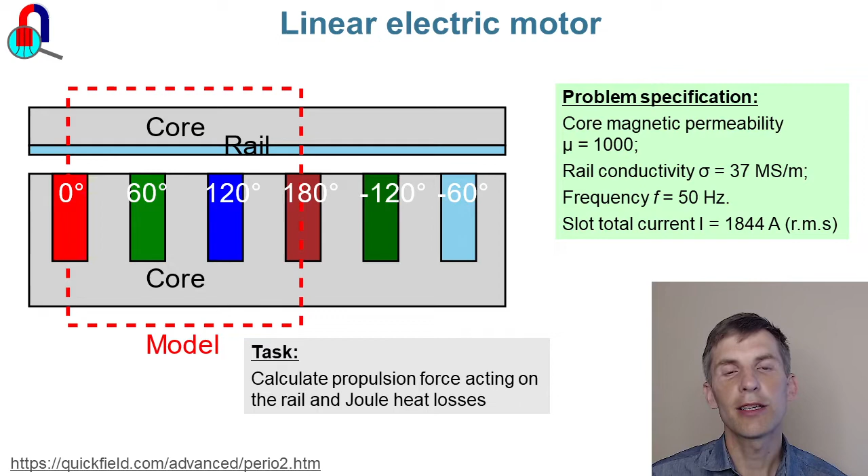Okay, let's start QuickField now. In QuickField, I create a new problem. Motor. Next. Problem type is AC magnetics. Frequency is 50 Hz. Every simulated device is a three-dimensional object. I'm going to simulate only a single cross-section, so the model class is two-dimensional plane parallel. Length units are millimeters. Finish.

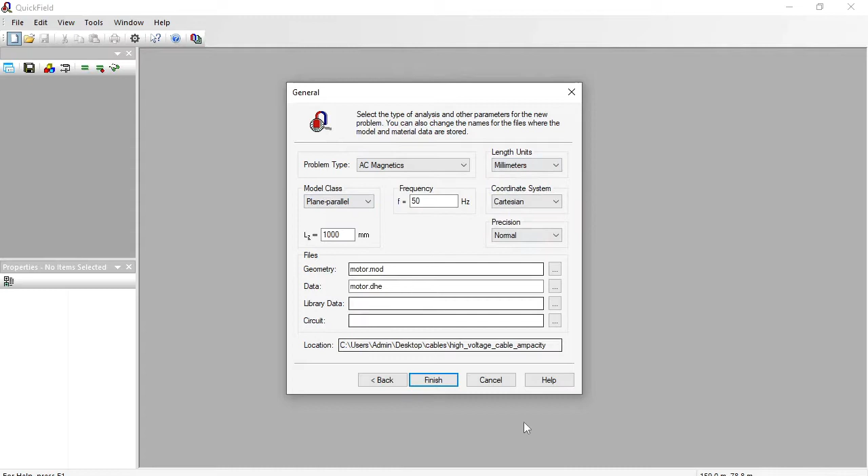On the left you can see the problem pane, and on the right is the geometry model editor window. You can draw the geometry model here, or you can import the model from the AutoCAD DXF file. Here is the file, and I will import it. This is the geometry model. You can simulate it as is, but I'm going to demonstrate how to utilize the symmetry of the geometry model. So I'm going to reduce the simulation domain.

Next, we have plus 120, and next we have minus 60. Again, they are opposite. That is called odd periodicity. Okay, switch back to QuickField.

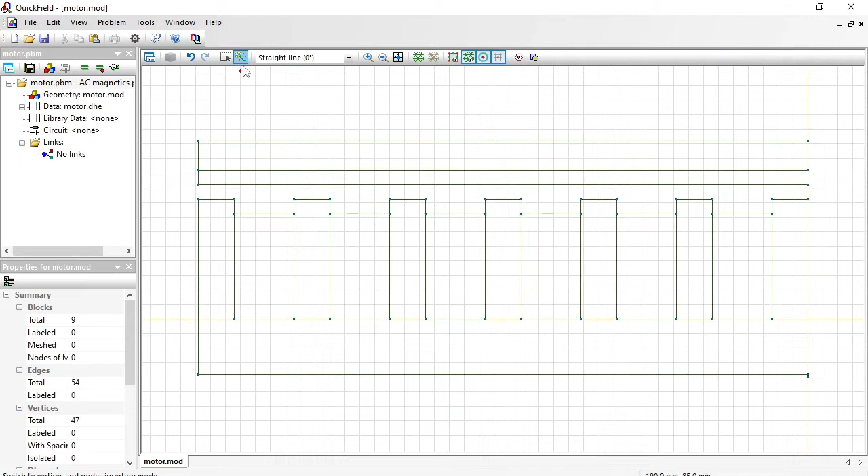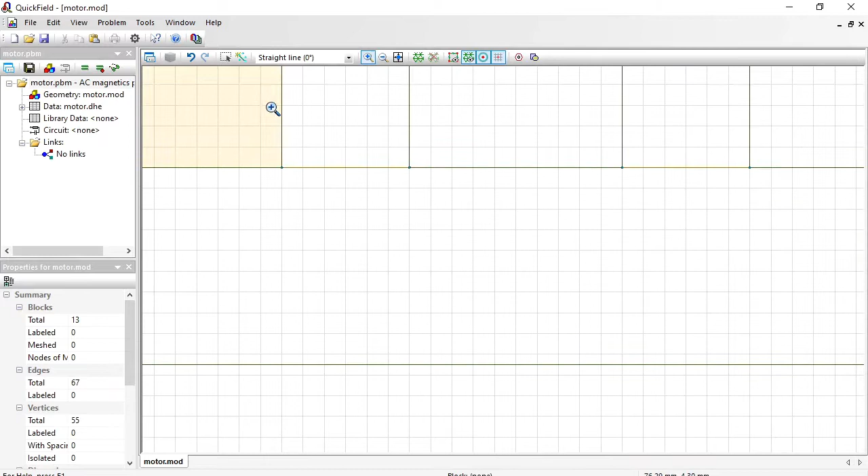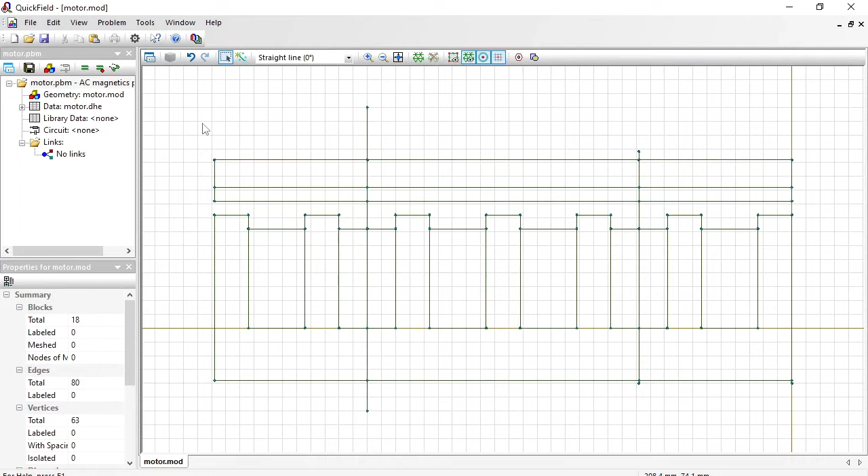Here I will switch to insert mode and draw the vertical lines here. And here, let's zoom in and zoom in again. Here. Okay, zoom to fit, switch to select objects mode, and remove the unnecessary parts. This one and these small edges.

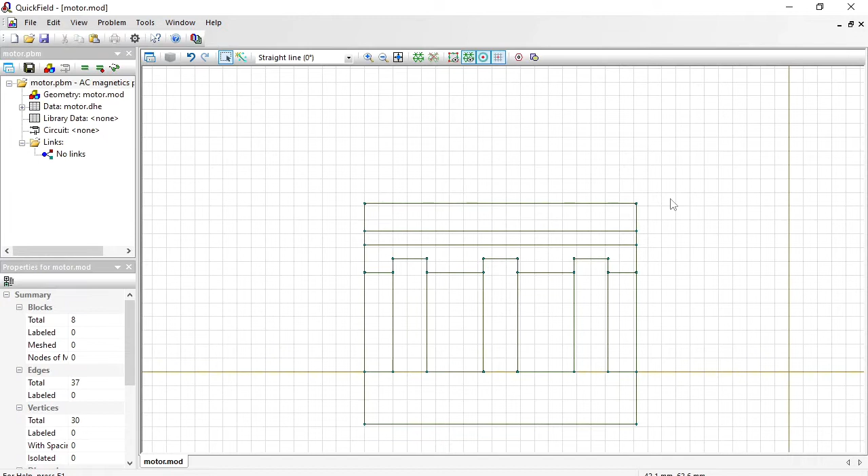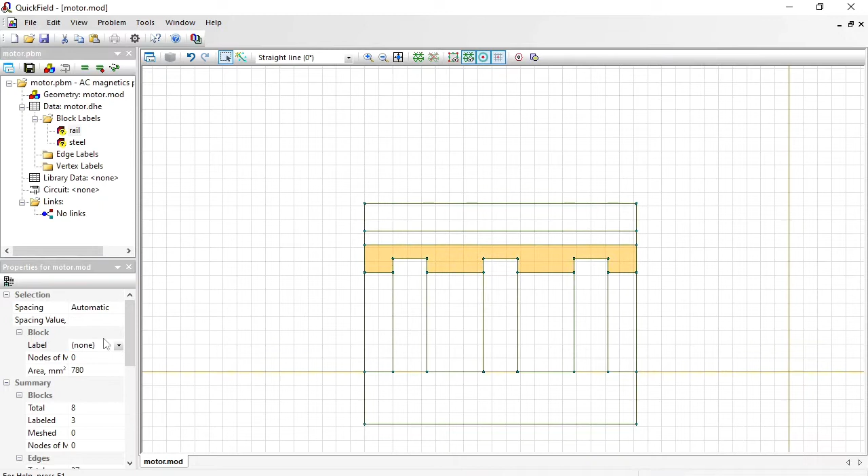Now let's assign labels. With labels, we will explain the geometric objects' meaning. This one and this one are steel parts. Steel. This is the conducting rail. This is the air. This is slot 0, slot 60, this is slot 120, and this is slot 180.

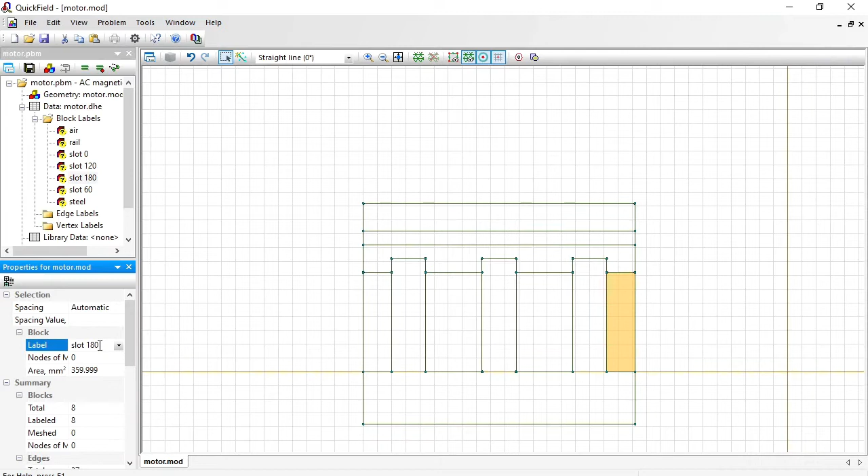Okay, and I should assign labels to the boundaries. Left and right boundaries make up an odd boundary condition pair. So I will select left and right. Hold the Ctrl button pressed to select multiple objects at the same time. Odd. And this is bottom. And this is top. So far, these are just text labels.

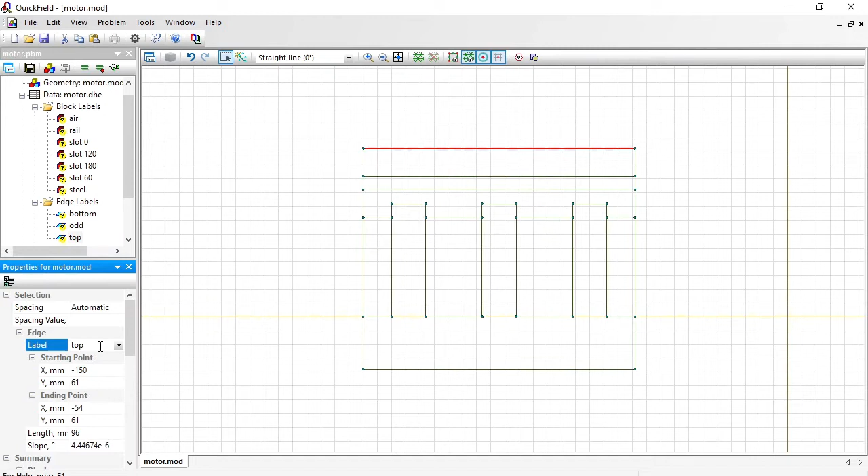Now let's provide physical properties for these labels. Double-click the label name in the tree. The relative magnetic permeability of the air is 1. Okay. Relative magnetic permeability of steel is 1000. Steel is laminated, so I do not specify electrical conductivity here, and I do not specify any current density here. Okay.

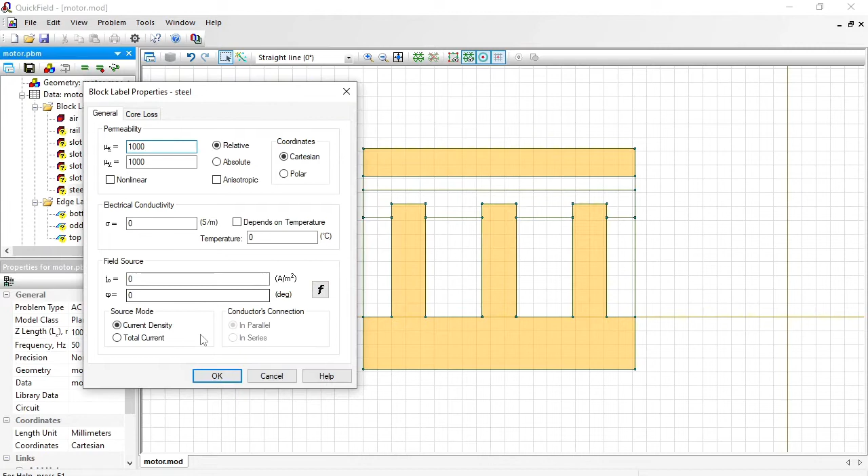A rail is made of aluminum. Permeability is 1. Electrical conductivity is 37 megasiemens per meter. Rail is not connected to any sources, so the total current in the rail is 0. Well, of course, there will be eddy currents, but the total remains 0. Okay.

There is a multi-turn winding in the slots, and each small conductor of the winding carries the same current. So the current density distribution across the slot is uniform. We can model this by specifying the current density value, which is current divided by the conductor cross section.

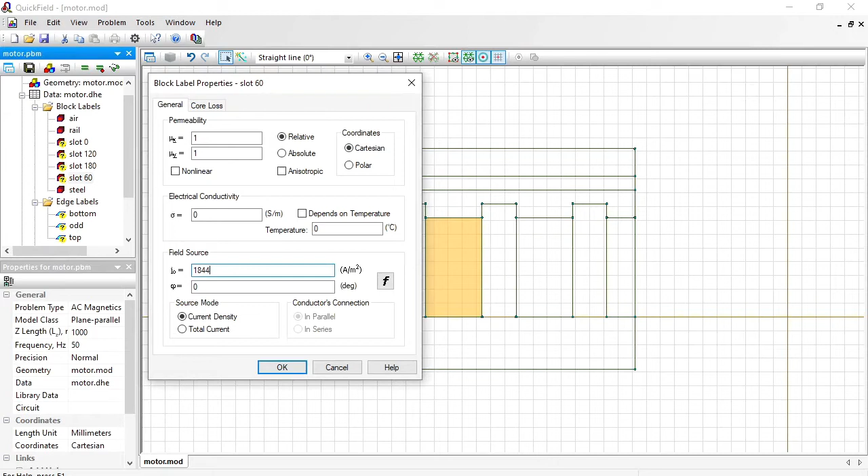The current is 1844 amperes, and the conductor cross section is, now let me see, I'll click here again. Here it is.

(720 millimeters squared), and here I should convert to meters squared, so times 10 to the power of -6. This is the root mean square of the sinusoidal wave. But in QuickField you should specify the magnitude. So I will multiply this by square root of 2, and the phase shift is 60 degrees.

Okay, I will copy this value and I will use it in other slots. In slot 0, we have the same current density and the phase shift is 0. In the slot 120, the same current density, but the phase shift is 120. And at last the slot 180. Okay.

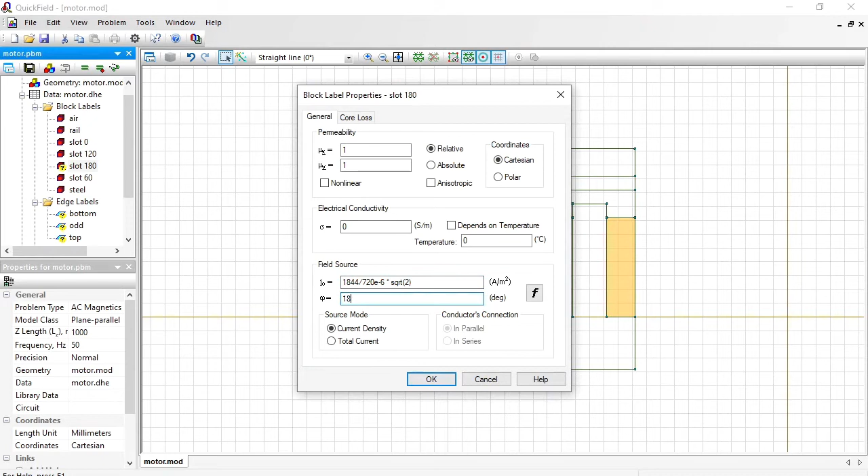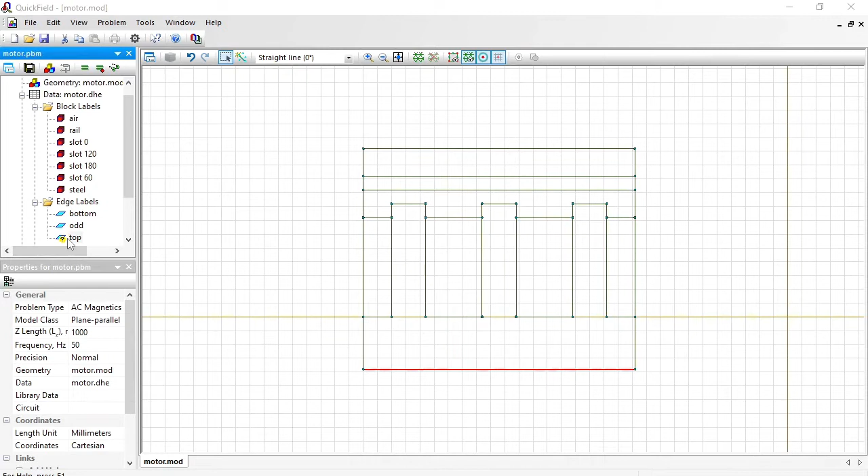For the periodic boundaries, I specify odd periodic boundary condition. Okay. The magnetic field is contained within steel parts, so at the bottom boundary I specify 0 magnetic potential. Field lines go parallel to this boundary. And at the top boundary again, I will specify 0 magnetic potential.

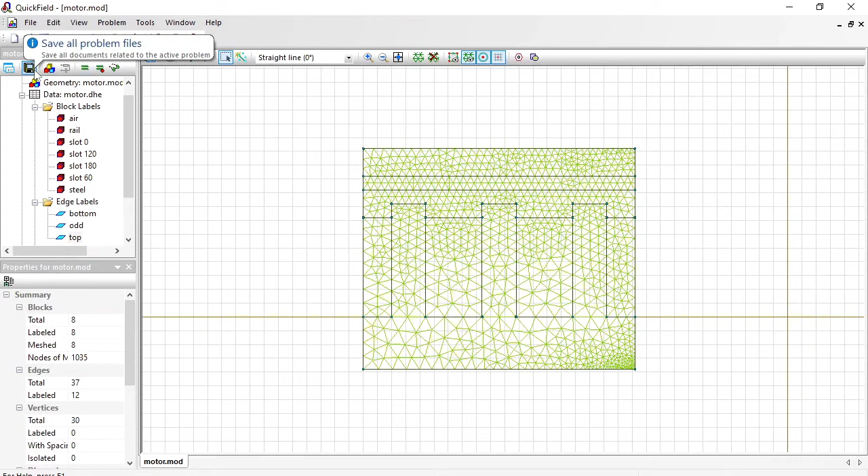Now the geometry model and the data are ready. Before I start the analysis, I should build the finite element mesh. Just press this button and the mesh will be generated. Now save all problem files and solve the problem. Take a look at the results. And here you can see the magnetic field lines and the color map of the current density distribution.

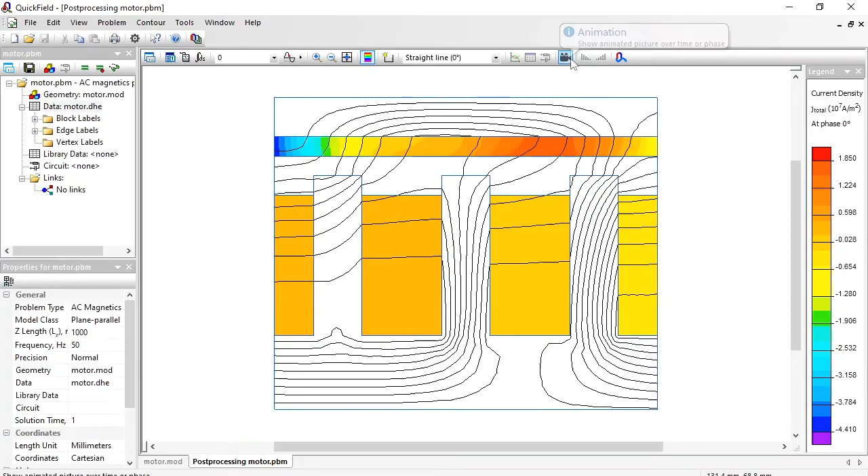I'm going to adjust the field picture and switch from root mean square value to the momentary values. And now I'm going to animate the picture. Here you can see how the magnetic field changes in time. Take a look here at the center. The magnetic field looks like rotating in the counterclockwise direction.

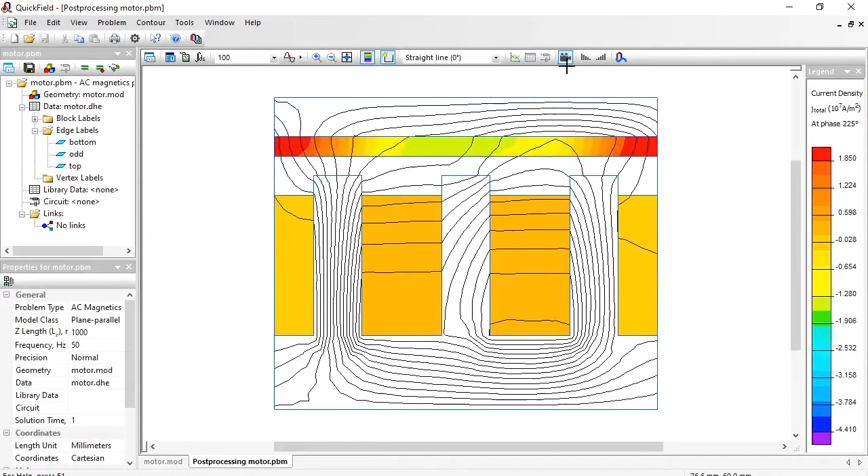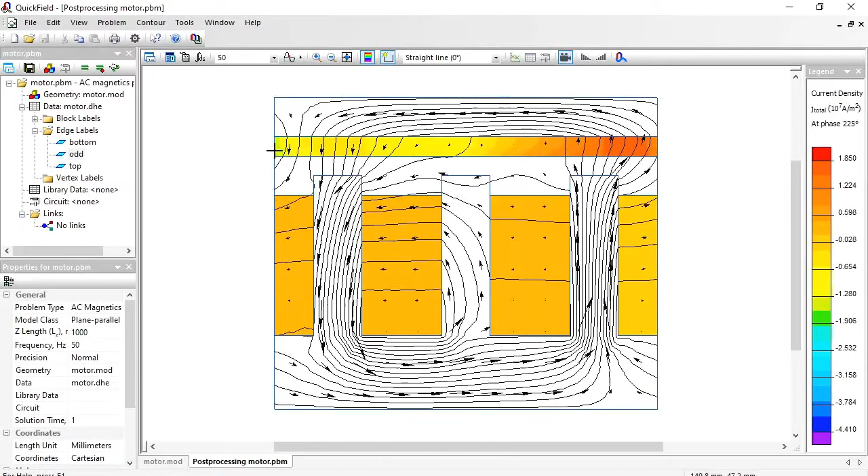Let me adjust the field picture. I will switch on the vectors of the flux density. Now pay attention at this central part, how the vectors are rotating. They are indeed rotating in the counterclockwise direction, so the magnetic field is running to the left. And the force acting on the rail should be pointing to the left. Okay. I will switch the animation off.

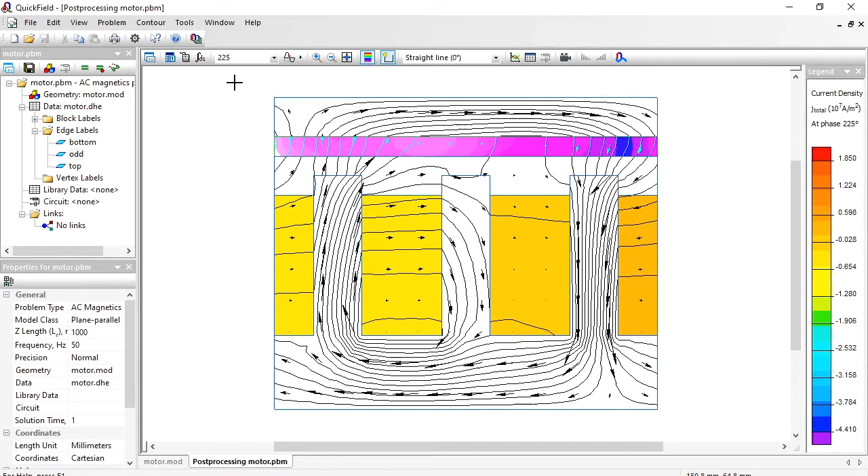Now, how to calculate the force? I will use the contour tool. Click to select the rail. Open the integrals. And here is the Maxwell force. Indeed, there is a component pointing to the left, and there is a component pointing down. The stator attracts the rotor.

And there are other integrals you can calculate. You can calculate, for example, the total current. Remember, it should be 0. But there are eddy currents, so the Joule heat losses will not be 0. These are the Joule heat losses. They are calculated for the motor of the 1 meter depth. If you have a shorter motor, for example, only 50 millimeters in depth, then the losses will be less.

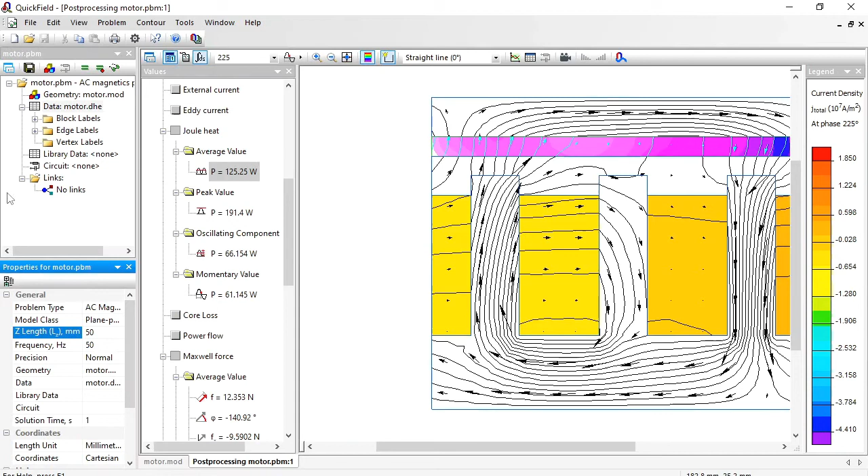Well, what else can you do here? You can adjust the field picture. I'm going to switch on the color map of the flux density. Okay. You can get the exact values using local values tool. Just click any point. And here you can get the flux density value, the magnetic field strength, and other field parameters.

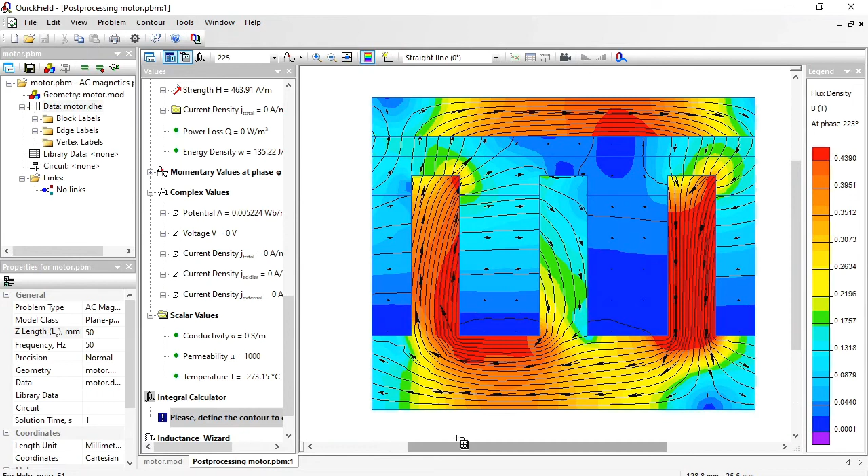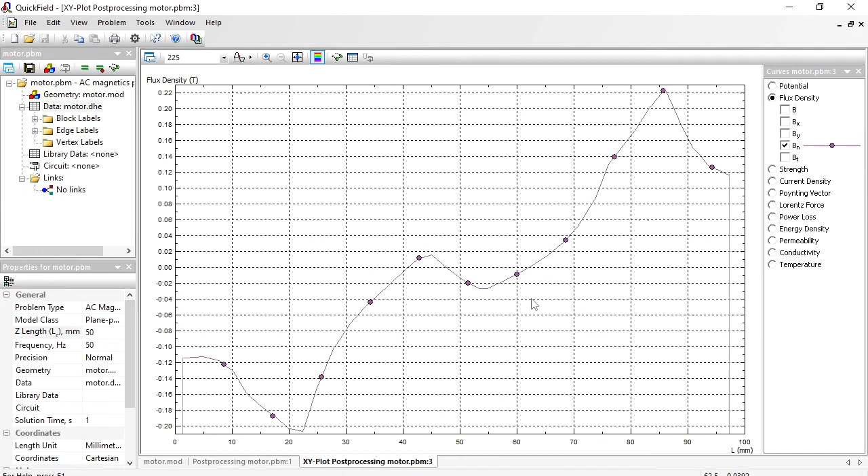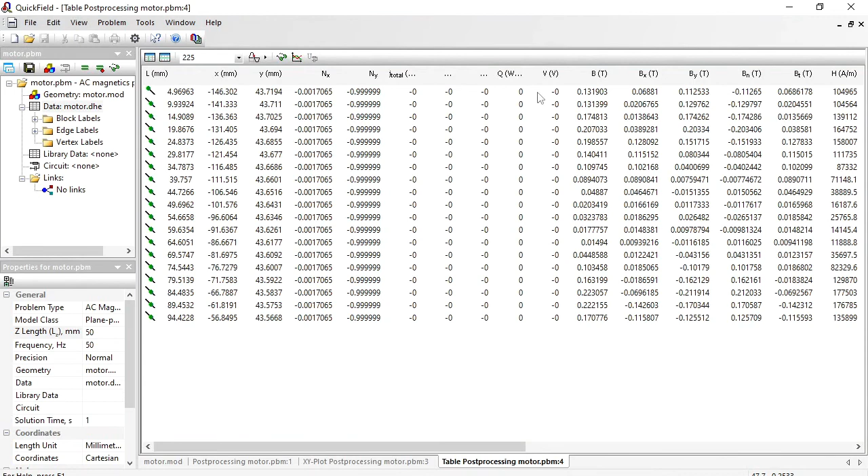And you can use the contour tool to get the field distribution along the contour line. Use the contour tool, draw the contour line here in the air gap, and open the XY plot. Here is the flux density distribution in the air gap, and usually we are interested in the normal component. And the exact values you can see in the table. Coordinates and flux density components.